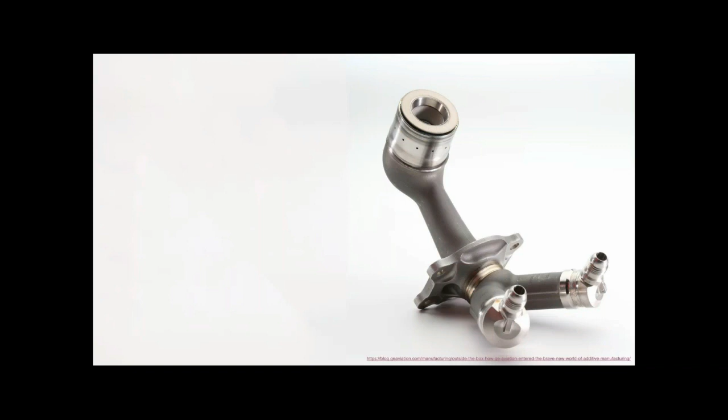But if we get on with the presentation, I'm sure many of the people who have been following the field of 3D printing or additive manufacturing in industrial scale are quite familiar with many of the cases from the aerospace industry. And for those of you who are not, this object that you can see here is actually a fuel nozzle that goes into a LEAP engine produced by GE. And in one engine, you actually have 19 of these fuel nozzles installed. And with this new design, they have been able to make it 25% lighter than the original version. It has better fuel efficiency, and it's 5 times more durable than the one produced in the traditional way.

And actually, at the moment, GE has 14,000 engine orders that have come in to purchase these new LEAP engines. And regarding the awesome facts within this new fuel nozzle design, besides the ones I already mentioned, it has 20 parts that have been combined into one. And actually, all of those parts are located in the area of the tip of the nozzle on the very, very top. So it's quite remarkable.

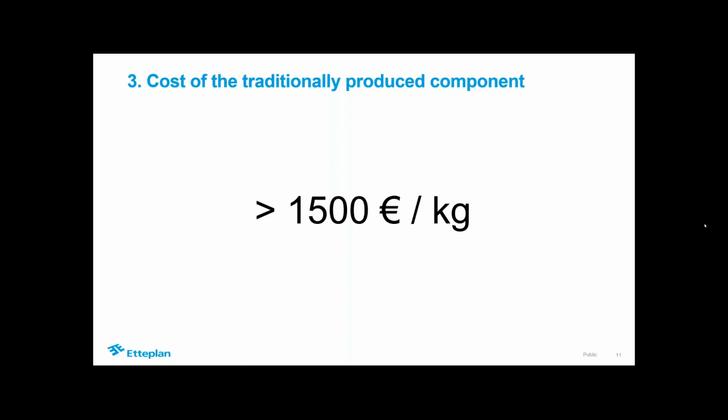So as I said, these have all so far been tips and hints in cases where you don't want to do too much redesigning, but eventually you want to do at least something because that has an effect on the cost. And here is one example from a customer case that we've done. So tip number 4: if most of the material is being removed in the current manufacturing process, then additive can be a great option. Over here on the left in the picture we have a machine component, and about 80 to 90% of the material is machined away.

So with subtractive or material removing technologies like machining, it doesn't sound like it makes much sense to do it that way. In additive we only put material where it is needed, and therefore 3D printing it and making these small redesigns, following rules of thumb like the 45-degree overhang rule so we try to avoid any possible support structures, can make the process more cost effective. For example, in this case, we reduced the volume by 30%, because less material means less cost.

And there's even potential for more if we did something like topology optimization. But in this case, the goal was to spend as little time as possible on the drawing board. And with just these small changes, a price reduction of 15% has been achieved for these components.

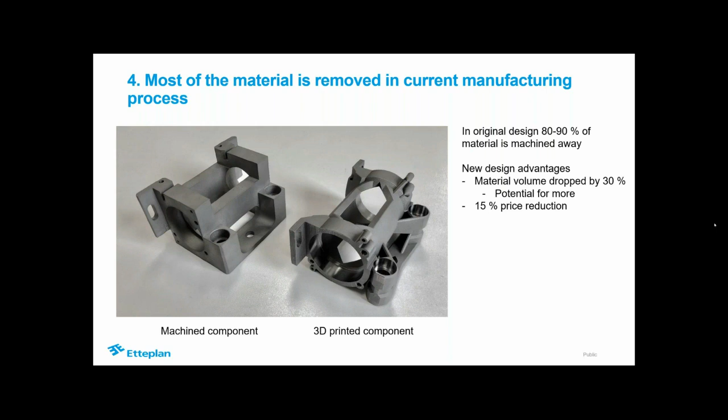Then if the annual volume of production is low, 3D printing provides a nice way to make your components. When you have small volumes, the cost per unit is quite difficult to affect. It's quite straightforward. If you give an order to a subcontractor for a million components, they might be more eager to lower the price per one, but if you only order 10, they couldn't care much. But of course, talking about low volumes, it is quite case dependent.

For example, on the left-hand side here, we have an annual volume of 1,000 pieces. This is a Y connector for a robotic sander. Here you can see the machined version received from the customer, machined from aluminum. Then we redesigned it for 3D printing, and by this redesign we were able to get the costs down by 40%. We got a better surface finish, and because it's applied to the end of the robot, we were also able to reduce the weight by 50%, which is quite good in these applications.

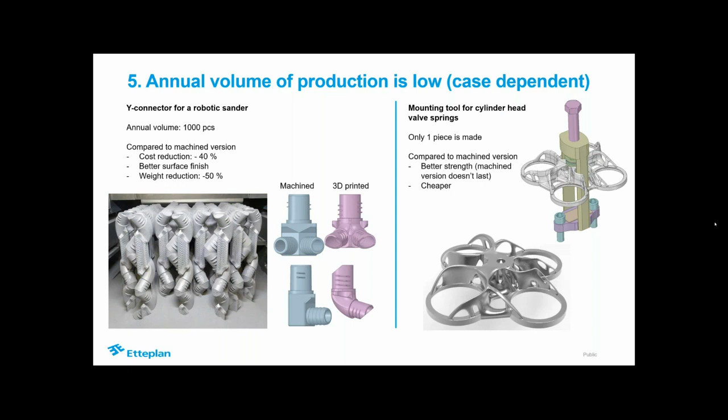Then think about the assembly line: you create complex products, you put many components into one and you never take them apart, so why do you do it that way? Simply because it's the only way of achieving the final product, or that's how it used to be. But nowadays, with 3D printing, like in this case Optisys has done, they have combined 100 components into one, and reduced the lead time of design and manufacturing from 11 to 2 months, which is quite much. Overall, they achieved minus 20% in production costs. And if you think about those 100 components and some guys putting them together on the assembly line, it's quite nice that you can just receive the whole package ready-made from the machine.

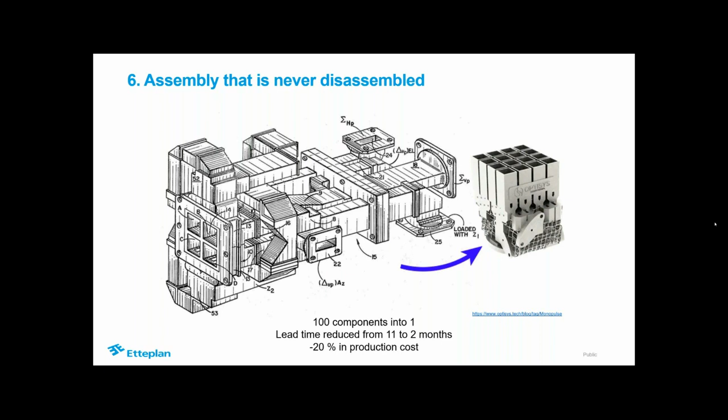Another example from assemblies: if you have a complex geometry, like here, 8 sheet metal components, this has been completely redesigned and now it's only one part, which is lighter but also stronger in the end application.

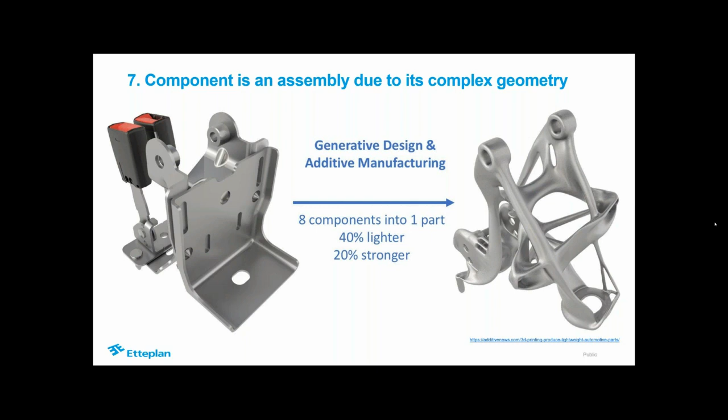We already talked a bit about the lead times that it takes to manufacture the components, and Siemens Turbomachinery has a great case from Sweden. So Siemens produces turbines that are being used for production of energy, and they have these burners inside them. And every once in a while you need to replace a burner because it wears out.

So in that repair process, previously they were milling about 60 to 70 millimeters away from the tip. Then you will reattach some new components into it. You weld them together. You need some sanding or grinding in between and all that. And the whole process took them 44 weeks to accomplish.

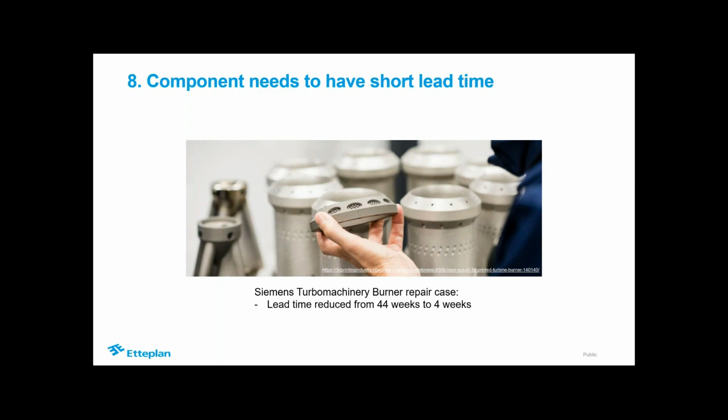But since finding out the possibilities of 3D printing, they actually now mill only 20 millimeters away from the tip. They put the whole burner inside the 3D printing machine, and then they print that 20 millimeters over there. And this way they have been able to get the service time to 4 weeks, which is quite nice and also brings extra value to the end customer.

Then when thinking about injection molded components, especially if they are quite small, in that case quantities can be even a bit higher. So it might be viable to actually use 3D printing to produce them. So in this case that you can see here, Oracle 3D printed with Carbon 3D technology 10,000 of these board alignment brackets made in plastic in just a few days, which is quite remarkable.

And anyone who knows about injection molding knows that traditional methods would have taken months to produce even these molds from steel by milling, and the cost would have been more than using additive.

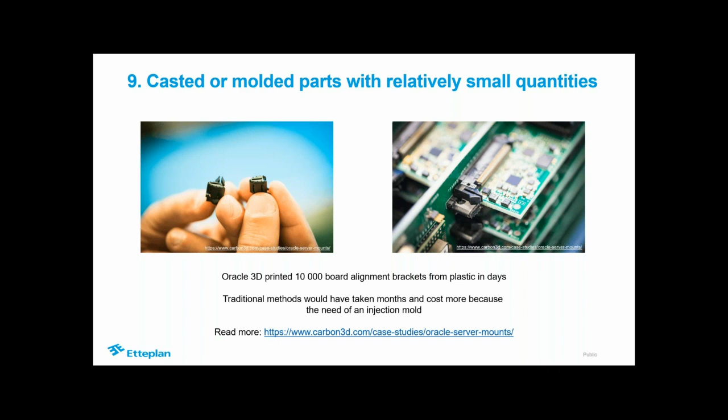So a custom-made tooling has been created to keep that in place. And these are the bits and pieces that you can basically print overnight. So you can get them on the next day at the work site. You don't need to order them anymore from outside, being machined from a block of plastic, for example.

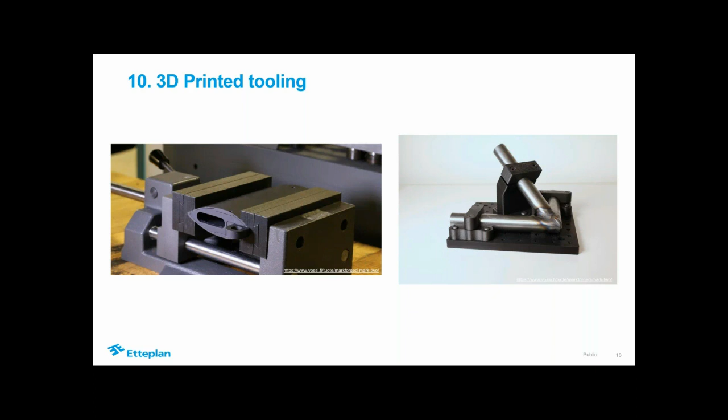Or on the right hand side, you can see this carbon fiber reinforced welding jig. It can take a bit of heat, so it doesn't matter if there's a bit of welding ongoing, and therefore you can create these custom made jigs that can fit in your production perfectly.

So now that we have seen some examples, it's pretty awesome to see those different kinds of components that have been made. But the question is, how do you actually design those? How do you do it? To that, I have come up with a little path for you guys. So the first step would be to attend our webinars.

So for example, next week we have Erin Komi talking about simulation-driven design. And then we have, for example, the costs that are in the business of 3D printing. How can you estimate them, and is there anything you can do about it, and so on onwards to industrialized additive manufacturing. Then I would say learn how to design for additive manufacturing. Check those examples online, learn how to do it, or you can ask us as well.

But the most important thing is to just get your hands into it and start doing. This is the key step. You don't achieve anything if you just stay put and do nothing, only observe. Get your hands dirty, start doing, start experimenting, and that's how you can actually get those vital lessons learned or good applications. Your eyes start to open. So get on with it.